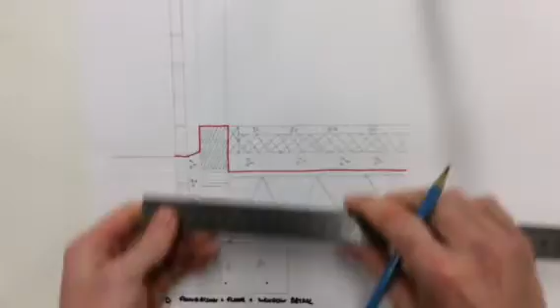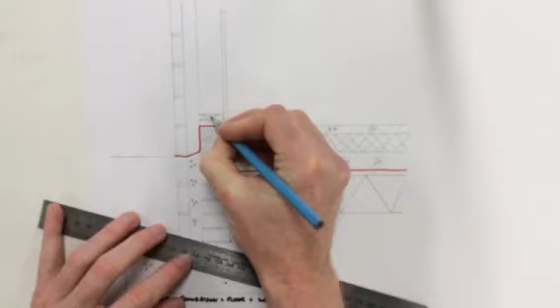Right, so we have our external wall, that's grand and handy, that's straightforward. But then we'll have to look at our timber frame. Okay, so your timber frame will be 200 wide, so it'll be 200 wide there. Bring a line up. You'll have a double sole plate, so the sole plate is 50 and 50, so 5 and 5. Right, there's your cross to show that you're using timber.

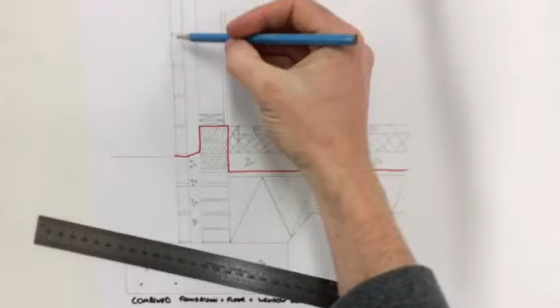Okay, and then we're looking at building up the wall until we get up to the windowsill. Alright, so I think right now should be the time that we look at putting in this windowsill, so we know what we're building up to. Alright, so just because that's the block I finished off on, that's the block I'm going to add my windowsill onto. Right, so windowsill varies in sizes. I wouldn't get particularly bogged down on it.

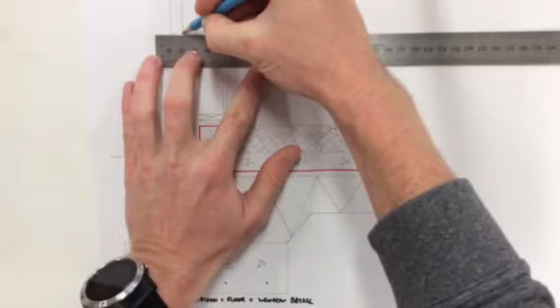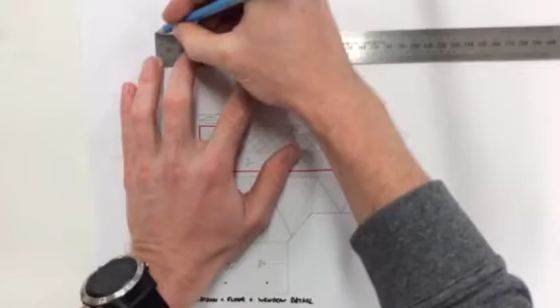Alright, so inside of that inner leaf there, I'm going to put in my windowsill. Alright, so I'm going to let it sit in about 8 mil into the cavity, and I'm going to let it out the rest. I'm just going to make it 30 mil long in total. Alright, don't get completely bogged down on the sizes of your windowsill, right? Because as I said, it varies from company to company or wherever you get them. Alright, so don't be stressing over that.

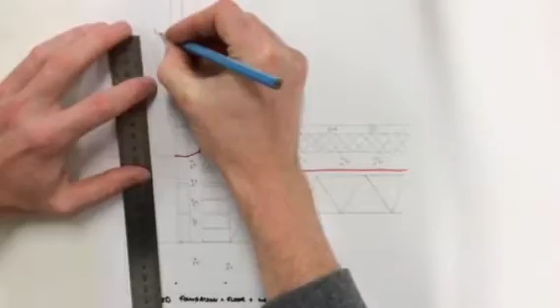So put that up there. You have your little section at the front, which could be 5 high. Don't forget about one of the most important details when you are drawing it, is your drip at the front. Okay, remember I've asked you to check that before at home. Seeing as you're at home now, you might be able to get out and just put your hand underneath the windowsill and actually see that it's there, that I'm not just making it up.

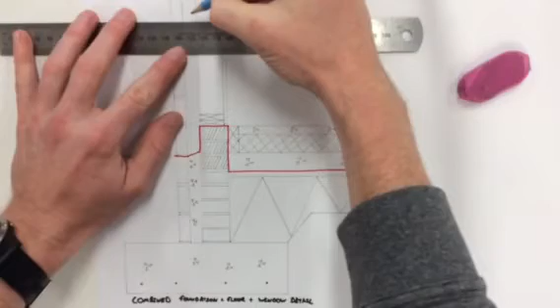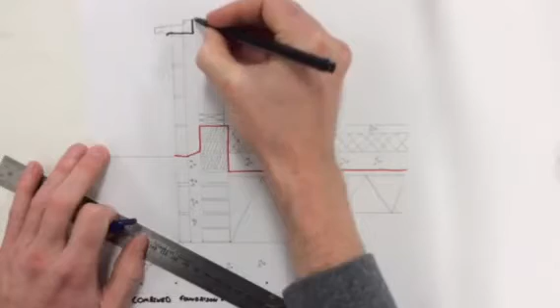So one other important detail then before we carry on, I suppose, is we have DPC wrapped around the windowsill. Comes out and then turns down there. Right, so any kind of break in the structure will have DPC wrapped around it, or somewhere in it, close to it. Then we can put on our external render.

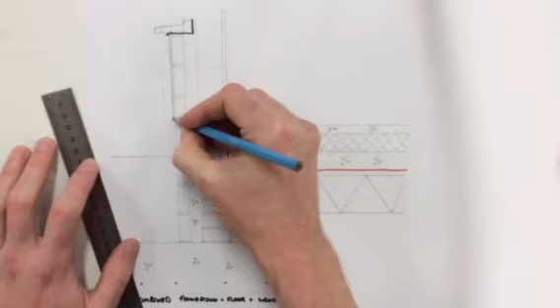External render comes down here. It comes down to this first block. There's what's called a plinth. Right, so the plinth again is designed to try and deter or redirect the water away from the building. Where you'd see it most at home, you'd have different colour paints just underneath that. Okay, so that's your external render put on there.

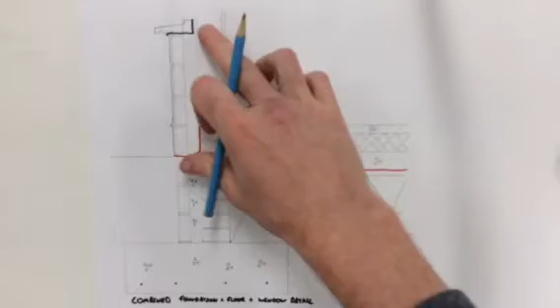So then we need to work on the timber frame. Right, so just getting the timber frame finished, and we have this drawing completed. So detailing for this. So we have our timber frame wall coming up here. So we're just going to put that at the same height now as the windowsill. So I'm going to work a little bit down now in this case. Right, so you would be trying to put cavity closing insulation on top of this. Right, so it would be 50 mil in thickness.

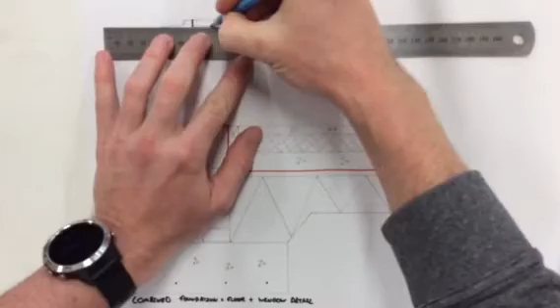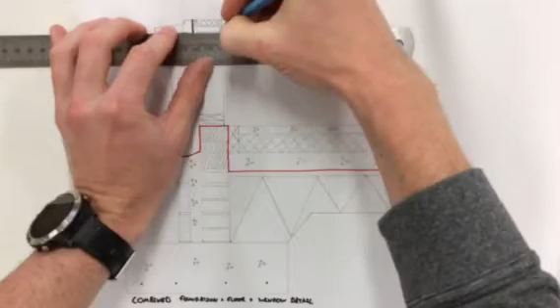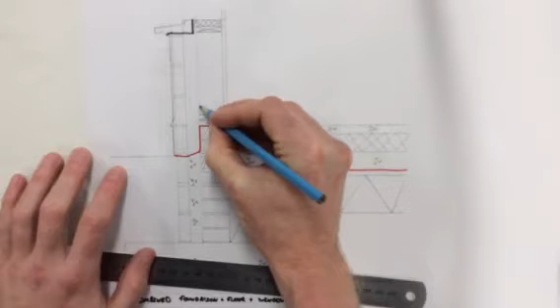Okay, so it closes off all of this. So rigid insulation put in there. On top of that, just like the timber used for the sole plate, you would put in timber here. That has to be supported, right? Because there might be stuff left on top of it. All right, so that's the main structure of your timber frame completed. All right, so there we can put in our insulation then into this. So our quilted insulation will be put inside of this wall.

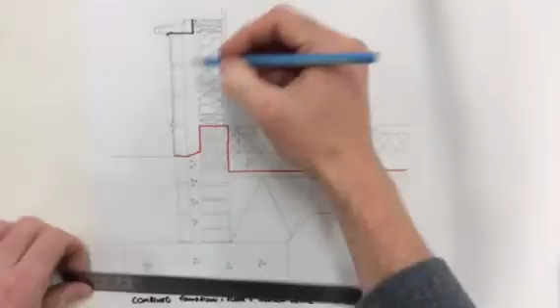So our quilted insulation is there. Then what do we have? We have a 50mm wood fibre board, which is put on the inside here. So 50mm, which is put on there. Be brought right the way up to sit underneath that windowsill. So put all the way up to there. So your wood fibre board, that is.

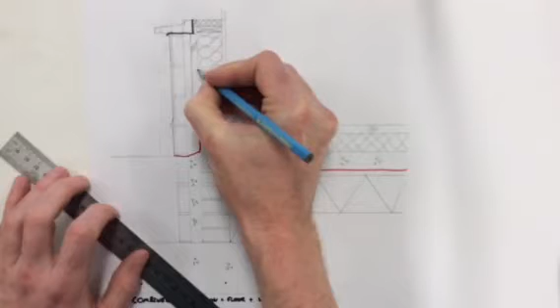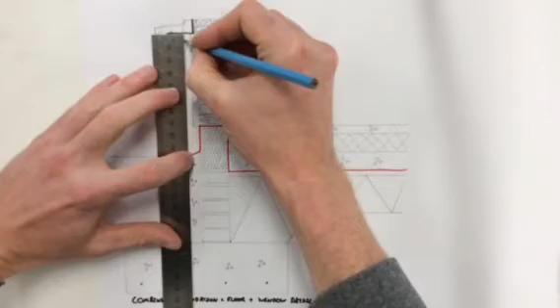Then you would have a small bit of rigid insulation put in behind the windowsill. Again, all preventing this thermal bridging from occurring. Then we have another cavity closing here, which would be 50mm also. Alright, so you're just trying to eliminate all possible risks, I suppose.

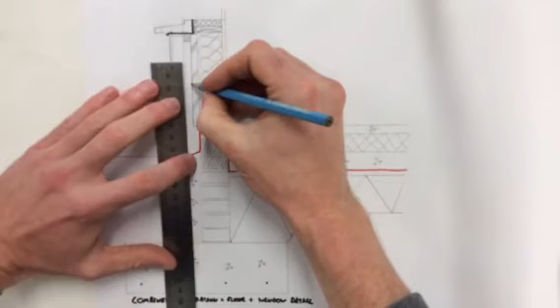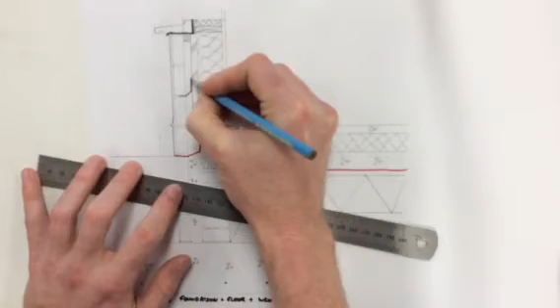Okay, so that's put in there, and then you have what's called an anchor strap that's put in, which is your equivalent of a wall tie. It's put in, connecting the timber frame to the outer leaf, which is quite important. Right, so you have a link there, so that's your anchor strap put in. Right, so it's like a wall tie, except it's for a timber frame. So it's put in there. That's called your anchor strap. Alright, so now we almost have that completed.

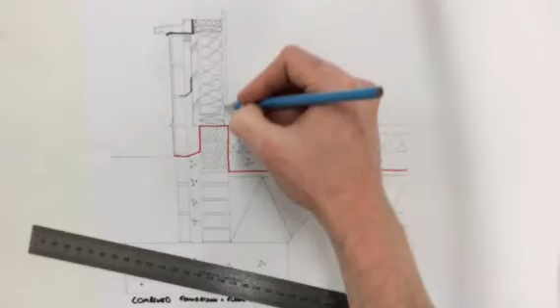Then we have to look at just the internal part of the wall here. Alright, so we have 18mm sheeting, which is there, which was already kind of accounted for just with our drawing. Alright, so that's 18mm sheet material. Then we have 50mm of insulation, or 50mm of a service cavity put on the inside. So 50mm insulation or service cavity, whatever you want to call it.

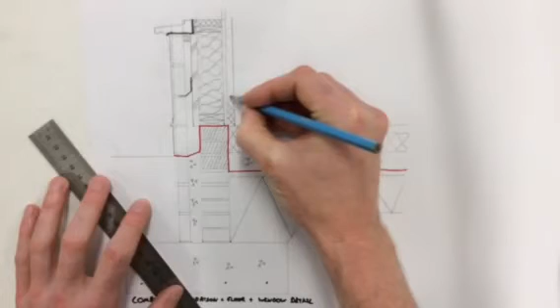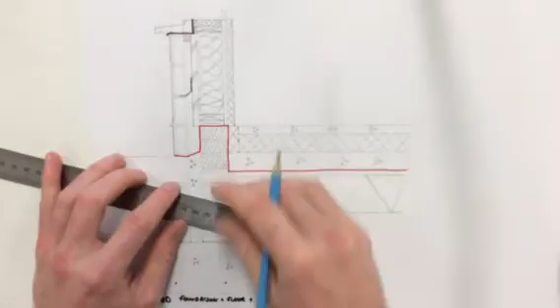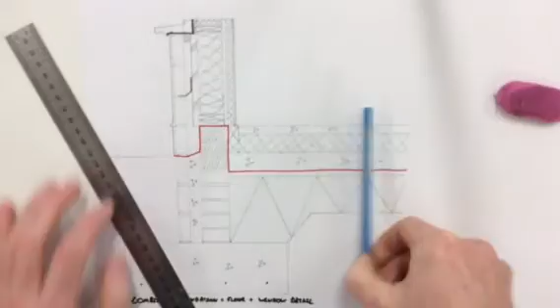Let's bring that right up to there. And then you have, on the outside of that, you have 12mm plasterboard and a skim finish. So put on the outside of that. Okay, so bring that right the way up to there as well. Alright, so then we could put on the window there and the window board, but we're not going to do that. So just other important detail in this question would be your air tightness tape.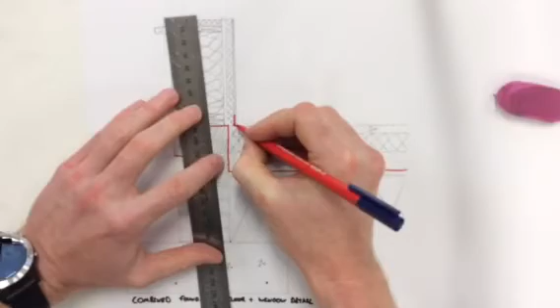So your air tightness tape would run here. It kind of seals that junction between the wall and the floor now, right, which is fairly important. Then you would have air tightness tape running across the top here. Alright, and it would kind of go in around the window frame itself, or the window frame would sit in on top of it. Okay, so that would be that sealed. Your skim and all these layers here would seal that, and then this is just your other junction problem.

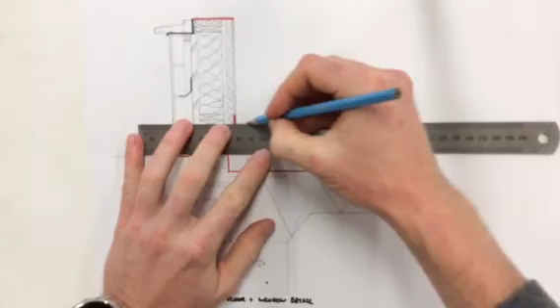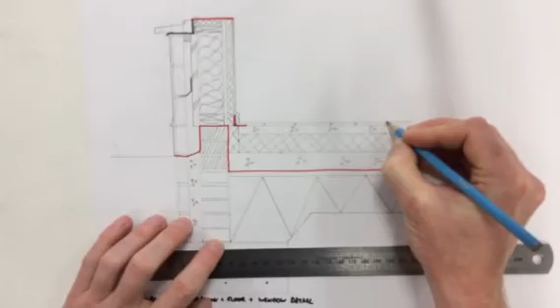And then, you know, other things you could add in as well. You could put in your flooring, so that could be your flooring, and then you could add in your skirting board profile if you wanted to as well. Alright, so your tongue and groove flooring. Or in most cases, they'll actually tell you what desired finish they're looking for in the question, so just make sure you put in the finish that's asked of you. Alright, you don't want to be putting in something that's not required.

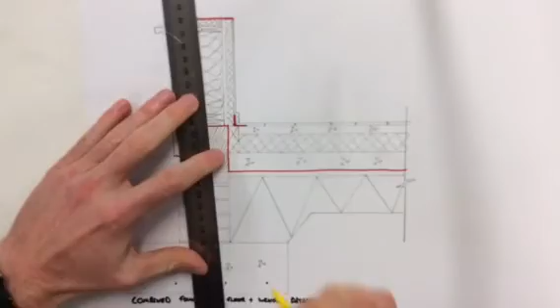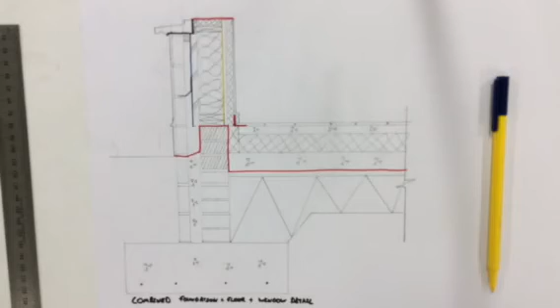Then just other small little bits of detail would be your vapour check. Okay, so your vapour check goes on connected onto that timber frame, so your vapour check goes there, and then you have a breather membrane. So the breather membrane is put on the outside of that wood fibre board to allow air to get in at your structure. Alright, so that would be that drawn. It's a combination of two.

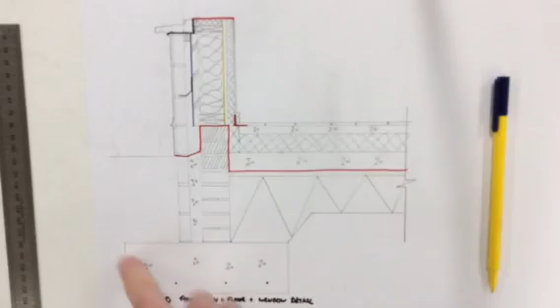Alright, like I said, we could add on the window frame up here just for a small bit. You will be given a desired size for that as well if you were required to do that in a question. Alright, so there's quite a bit of detail in the question. This section here should be revision, and then this is probably the trickiest part of it. Even if you could get up to there, you know, you're looking at 70% of the question.